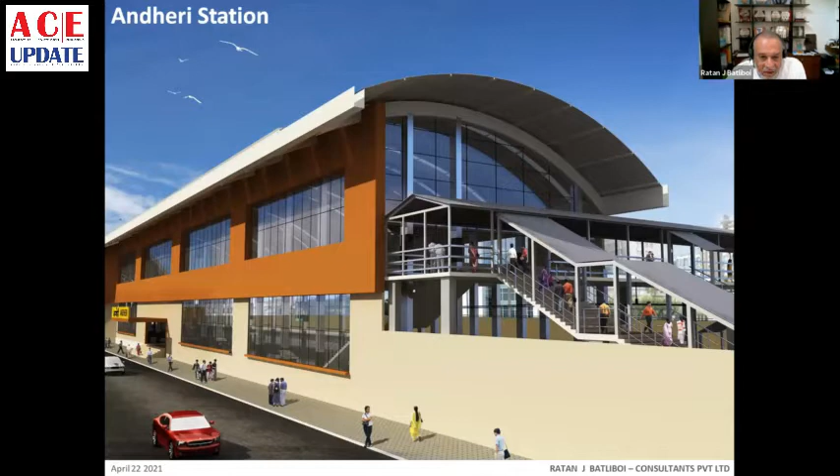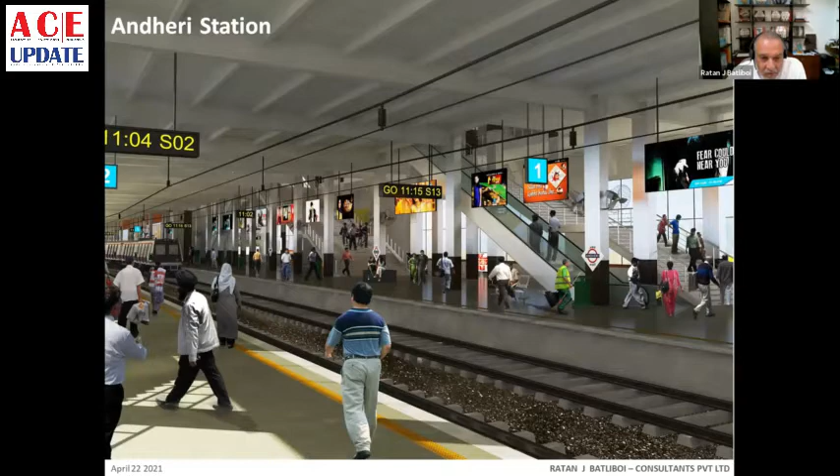Lots of alterations and changes to the existing stations that we had to incorporate newer technologies, to look at extensions, to look at the way passengers would react to the new amenities and things. So there's a few of these photographs and views.

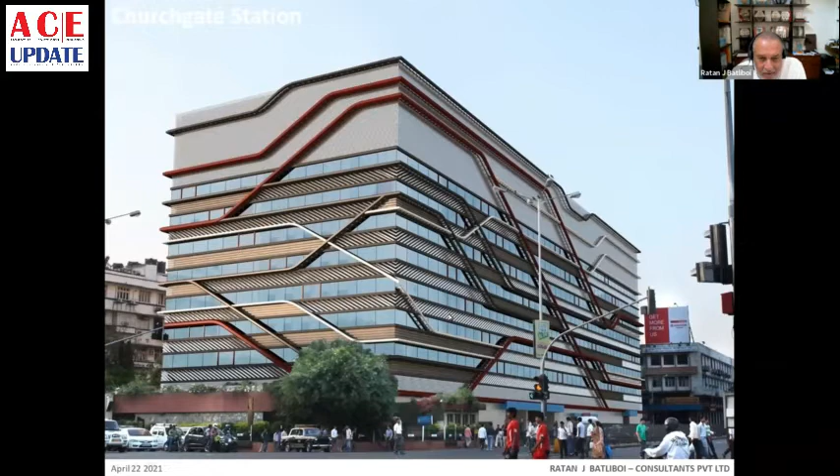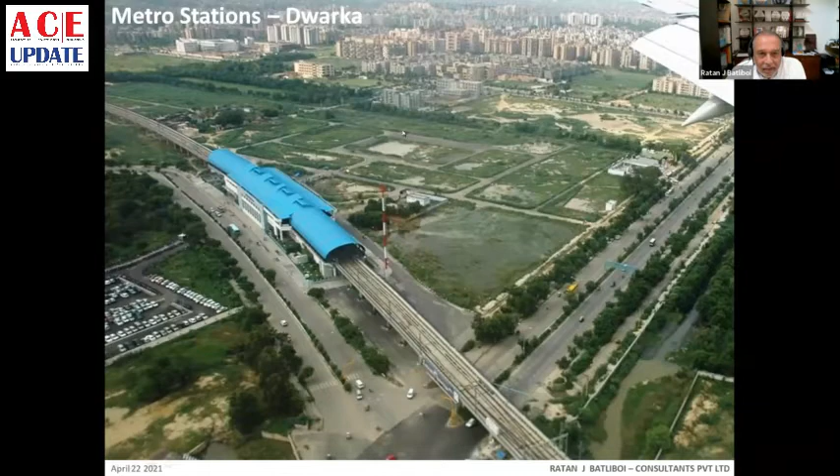We also looked at cladding of the railway station buildings in and around the Bombay Metro. For Delhi Metro, we've done a few stations - in principle, we did the Dwarka line and the Noida line. So I'm just going to show you a couple of views of that.

Very simple, seamless, jointless, very easy to maintain structures. We did about 14 odd railway stations, and they've used this design going forward in many more that we've actually not been the authors of.

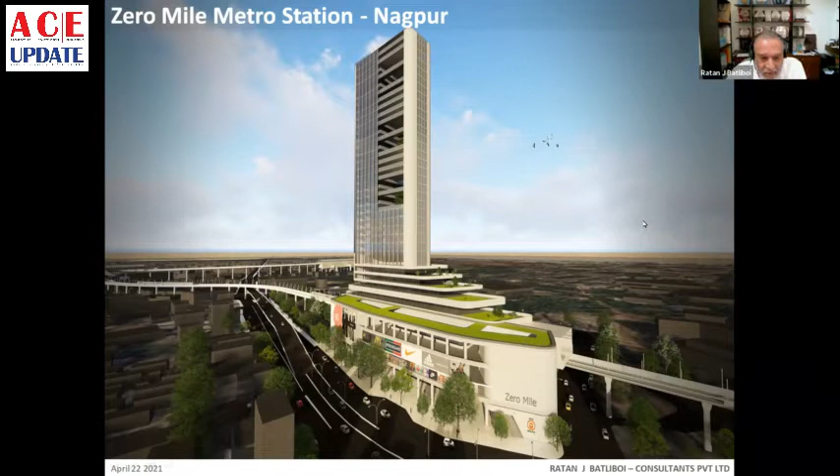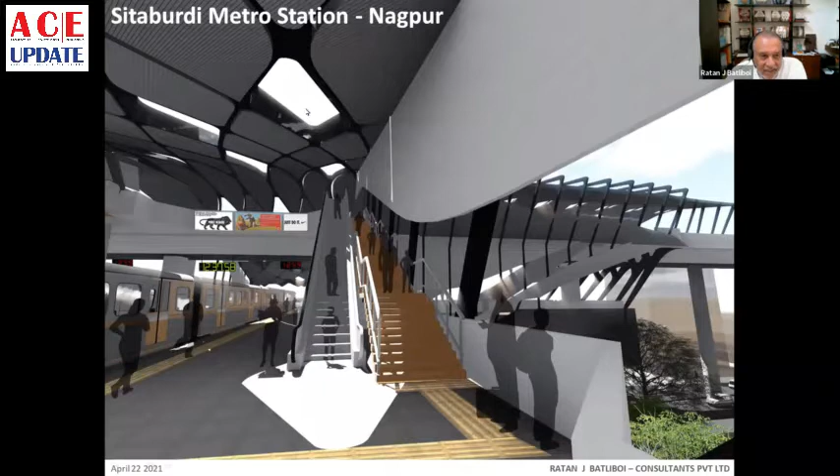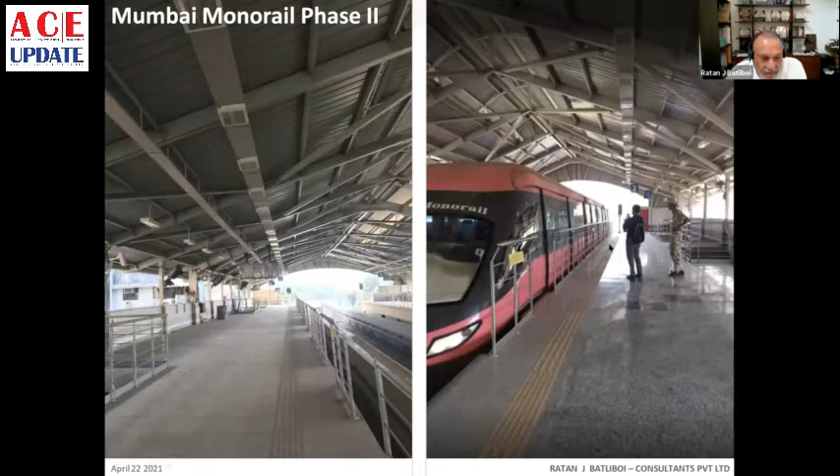Railway station integration with commercial spaces is very exciting now, and they're looking at a lot of things, so I'm going to show that to you as we go along - new concepts of rail over rail and very large terminal buildings in the metros, new skins, new design for railway stations, trying to bring photovoltaics into the ceilings and ceiling skins so that we can become independent and positive energy oriented. We've also worked on the Bombay monorail phase in terms of trying to develop the overall railway stations as the clients wanted them. I'm going to introduce a few concepts here.

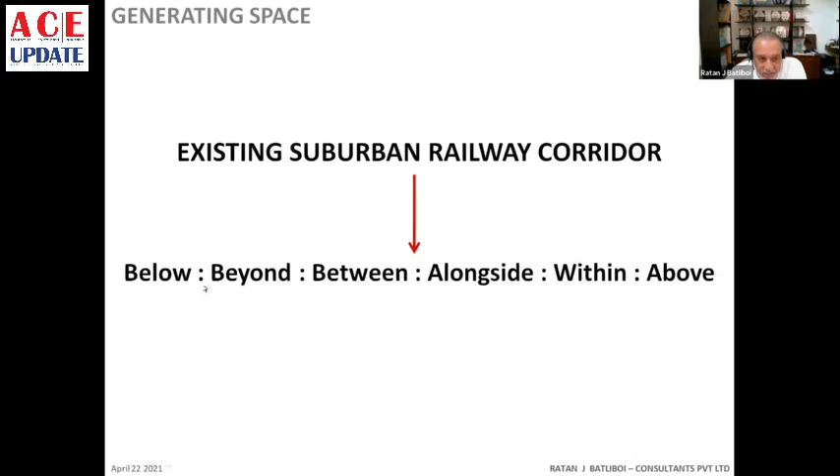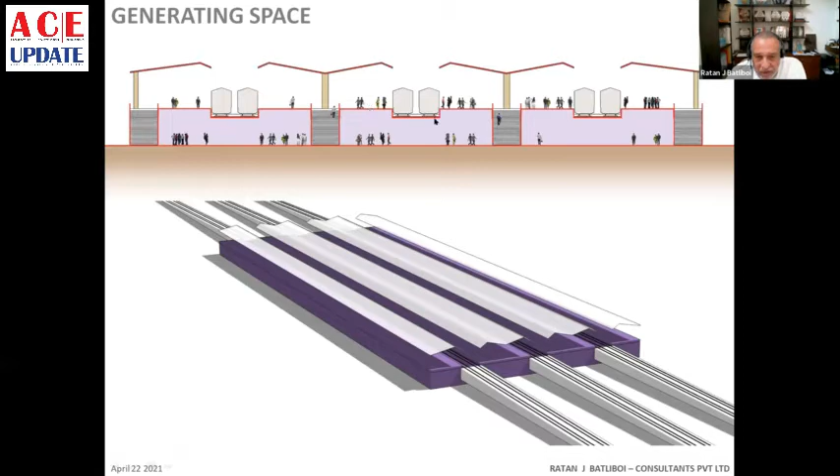The first is below railway stations, where this is the typical scenario. Effectively, if we can dig under and float the railway stations or the railway tracks above, we get a huge amount of space below.

The second is beyond. In normal situations, sometimes there's a road that goes alongside the railway station. If we can extend it and create a large car park or a large facility next door to it, that's the way we're looking at it.

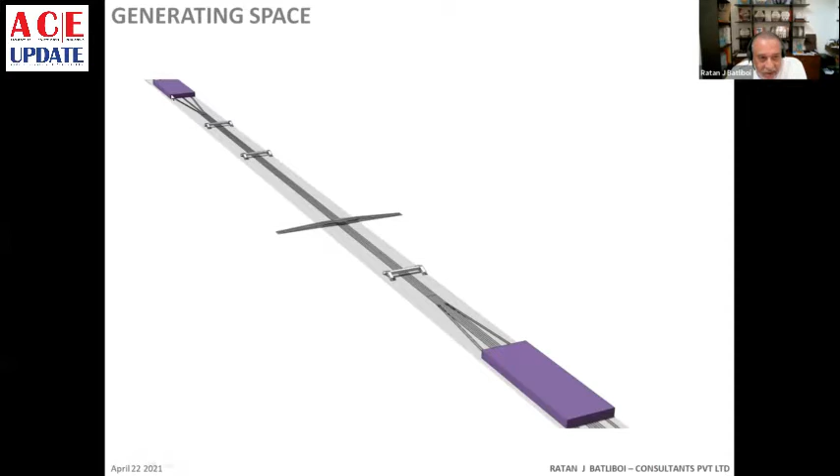If we look at between stations, if these are two purple stations, we look at a third station that comes in between. This is just creating more space on the railway lines, which is technically free space that one can develop on. Alongside is very simple - we've done this in a lot of our station projects.

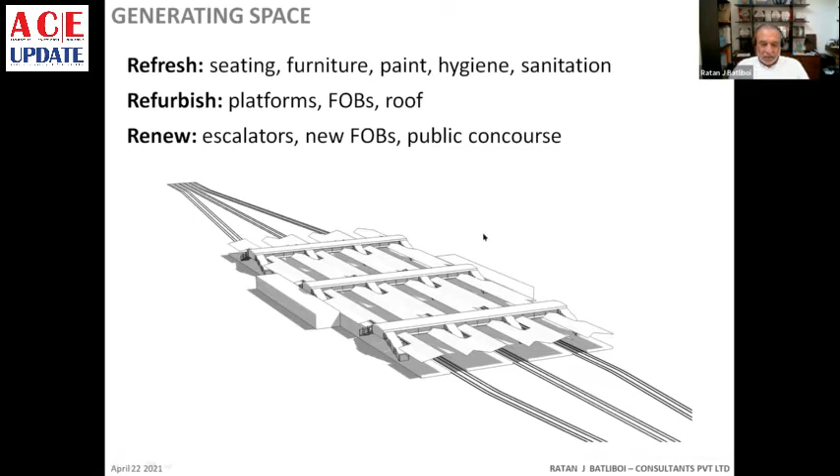Within stations, it's of course refreshing, refurbishing, renewing, things like this for public access, better amenities, better FOBs, more public concourse - basically giving the Indian commuter a little more space to use the facility more effectively. And then we talked about above the railway station - typically, you have the foot-over bridge that goes over.

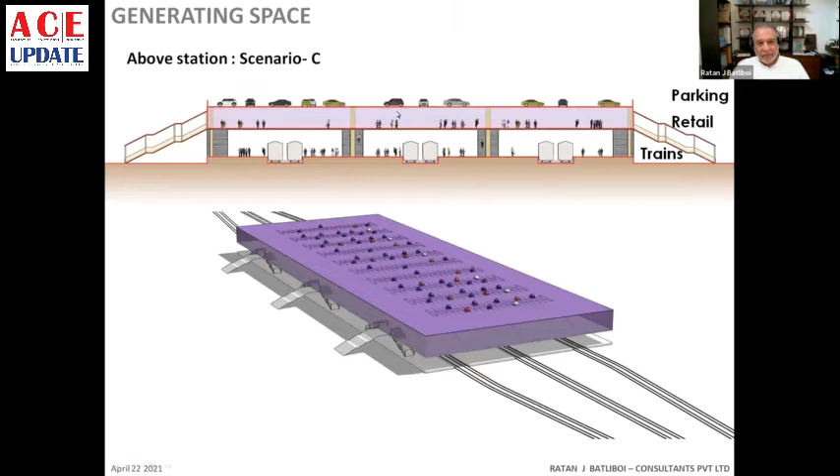And if we can extend that into a large car parking space, or we can go into a mall sort of environment, or we can do a car park as well as a mall environment, multi-layered, as we can see. So in principle, these are the sort of concepts that we looked at.

I'm looking at a new project situation, a new concept that we created in the early 90s, which was creating value, not just adding value. Kharghar railway station was an example of this.

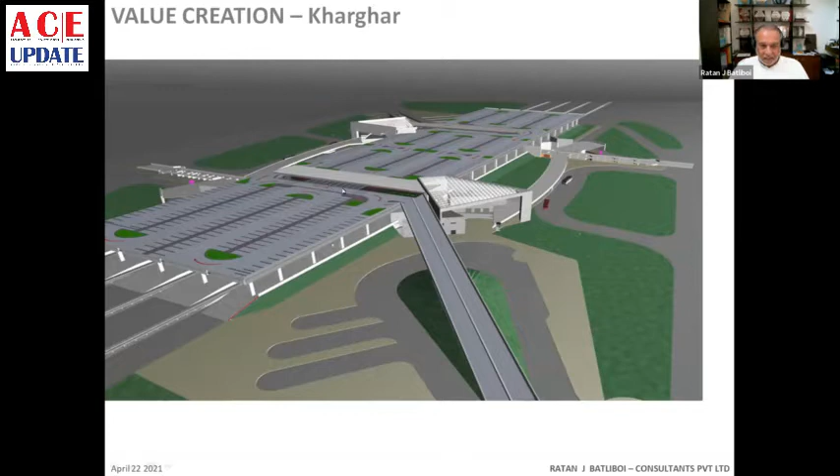Kharghar railway station had about 65 meters by about 210 meters. And instead of doing car parks on the ground, we took all the cars on top. We created parking on top. So in principle, we created a parking space of approximately 700 odd cars.

Our concept was to do 700 into 3 tiers, so you could create almost a kiss and ride scenario, or a drop and ride scenario, park and ride scenario for about 2,000 odd cars. But we weren't allowed to do that by the government at that time, because they said there weren't even 700 cars in this area at the time.

But having said this, this is the broad scenario. If we had to park these cars, we would have needed this much space on the ground next door to it. Having said this, we did not need this.

We were actually able to commercially exploit these areas, or harness these areas, to get the money for the capex of the project. And the OPEX of the project is generated by the number of cars paying you a car parking fee on a daily basis.

Of course, when we wanted to do this into multi-tiered, etc., we weren't allowed to, but this is the situation 25 years since we actually built this.

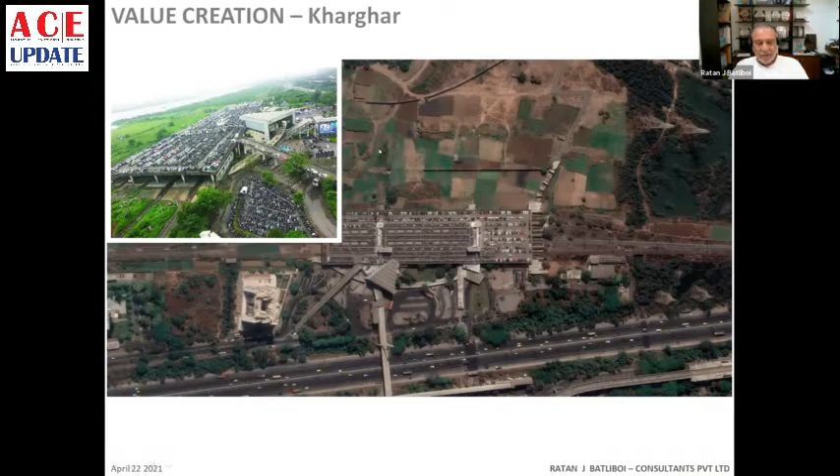Next to it is 12 acres of old buildings, the MSRTC bus station, the bus depot, the BEST depots, which is about 8 acres. We sort of looked at an entire multimodal precinct happening around these areas.

And it's truly multimodal because you have the monorail, you have the metro rail, you have the suburban, you have the terminal station, you have the Maharashtra state bus terminals, you have the BEST terminals, you have taxi staging, you have private taxi staging. Everything happens within a sort of 500-meter radius.

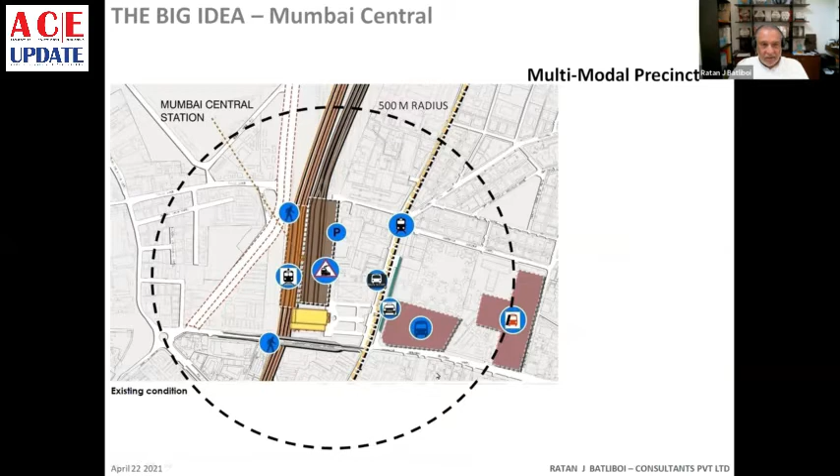And having said this, in principle, what we said is that we'll try and bring all these areas on top of our railway station property. And by doing that, we sort of looked at releasing the land on the ground.

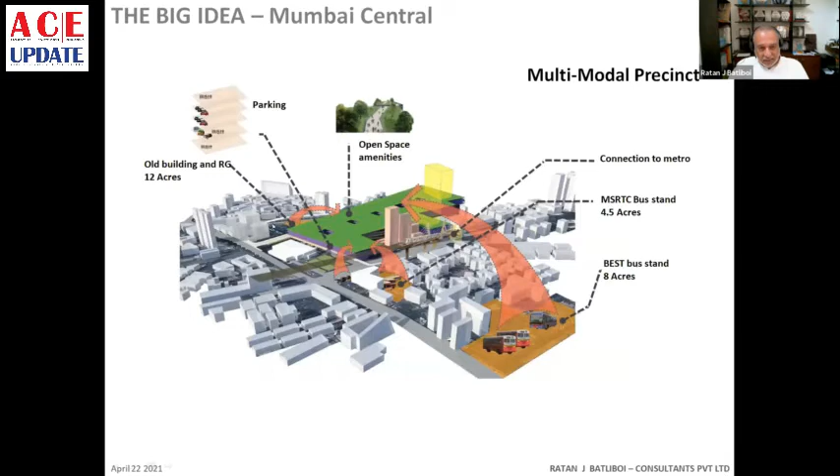So all these areas that are here on the ground are released and created into green spaces for the city. And we take all those functions into a multimodal hub.

This is really truly a scenario where all transportation facilities, as many as you can see here, actually come together in one consolidated scenario. And the entire thing retains the heritage of Mumbai Central Station.

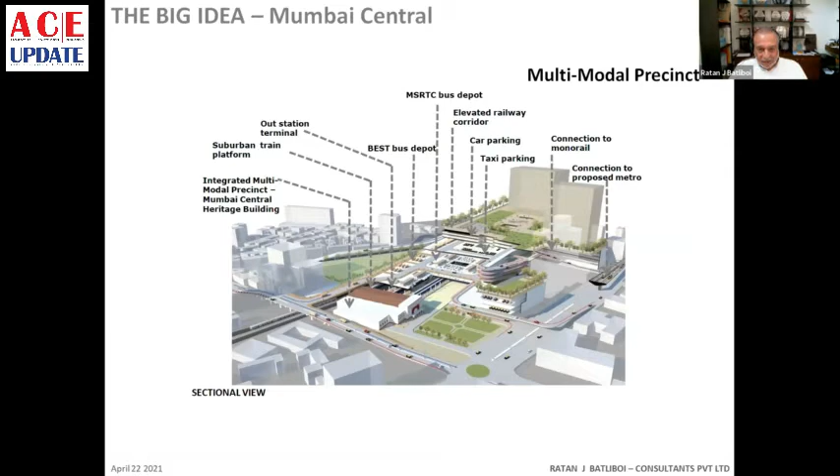We have takeoffs on the road. The entire traffic is completely differently managed. And this is sort of a very interesting game changer product that we've been trying to push since the early 2000s, not to mention that you would be able to do multi-tiering.

On the left-hand side is a list of all the modal transportation aspects that you could bring into this space.

And in principle, you could do towers, or we had proposed to do these large residential towers. At the podium level of these residential towers, you get an additional 20 acres of green space for the towers and for the city itself.

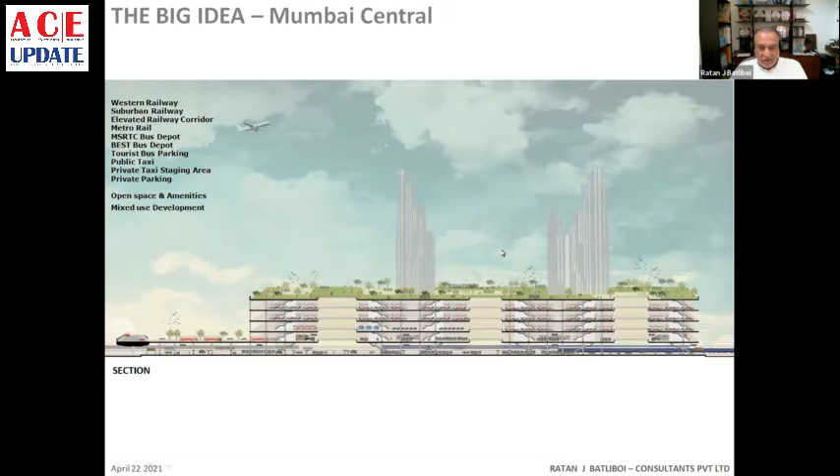So what you're doing is generating 25 to 30 acres at ground level and an additional 20 acres at an upper level. The towers were being designed to fund the project to the tune of about 3,000 odd crores. So in principle, this is our overview.

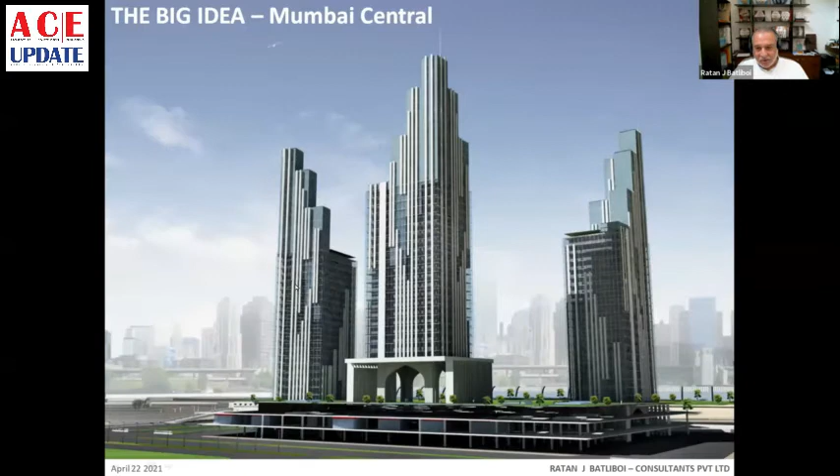And these are a couple of slides to show the sort of artist conception about how this could physically happen in a Bombay environment.

The most important thing is the new transit-oriented development that's happening. In principle, we look at the micro planning, the meso planning around the station, and see how that affects the overall macro in terms of the urban and natural environments. The connectivity that happens on both sides of the tracks, specifically in Bombay, is very, very critical.

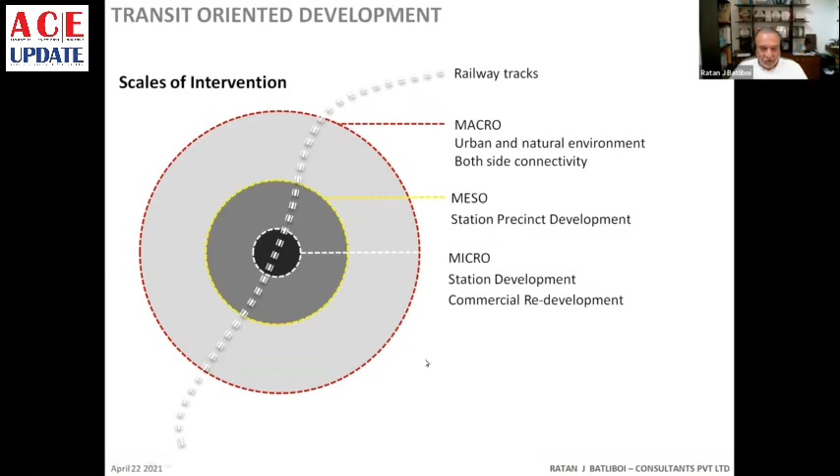I'm just showing you a couple of very quick examples. One was the LTT station in Mumbai. This was the land development. The green space was the additional land we suggested we would take, and the commercial development we could create is almost 8 acres.

That's roughly 32,000 square meters of space, and the area under the railway tracks is about 109,000 square meters. So that's 27 acres plus another 8 acres of land that one could have access to.

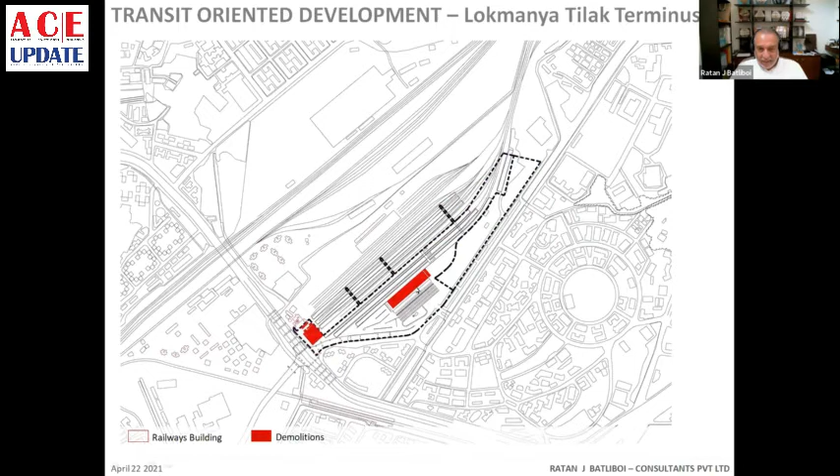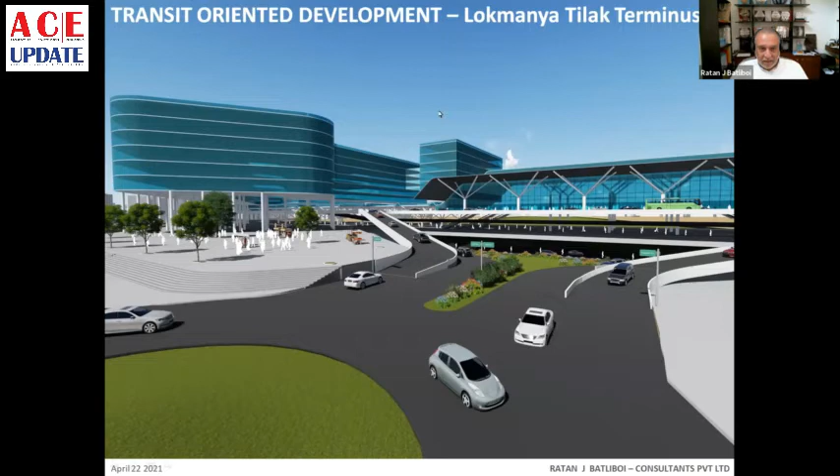We develop it effectively by cleaning up the rail buildings, cleaning up the land to be extremely efficient, creating large, beautiful public plazas and urban interventions, facilitated by traffic management and large spaces, reflecting the lifestyle of the people who would use the spaces, and commercially oriented by renting out spaces that the railways could generate using their land as a free resource.

So these are a couple of views of that.

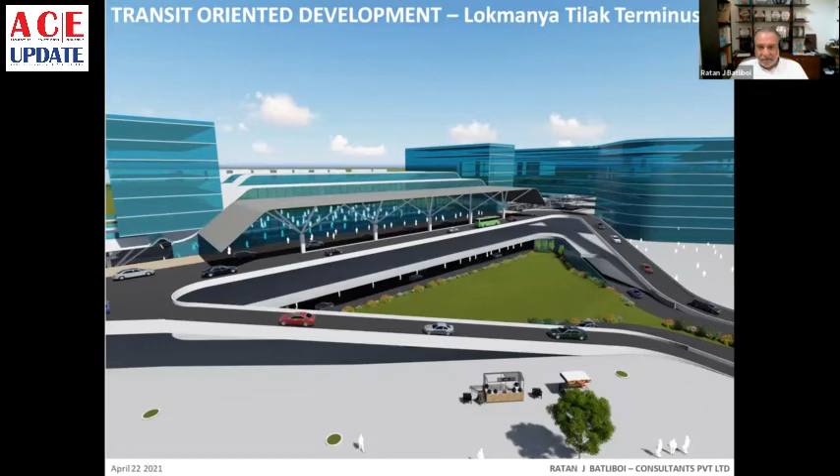Another example is a live, work, and play scenario where we talked about residential, commercial, and recreational space, and we looked at doing this over railway yards, which is really free space.

It can be easily converted into harnessing the commercial potential, which allows the railways to generate large amounts of wealth, and use it effectively for better services to the commuters that use the property.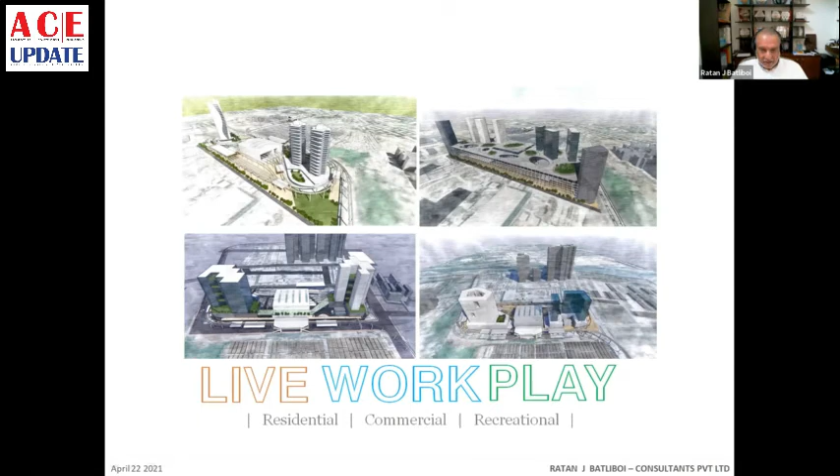So in principle, there's the yard that we had. This is the large depot building that we have on the ground. We were talking about building over the entire depot building, and we looked at a mixed use plan.

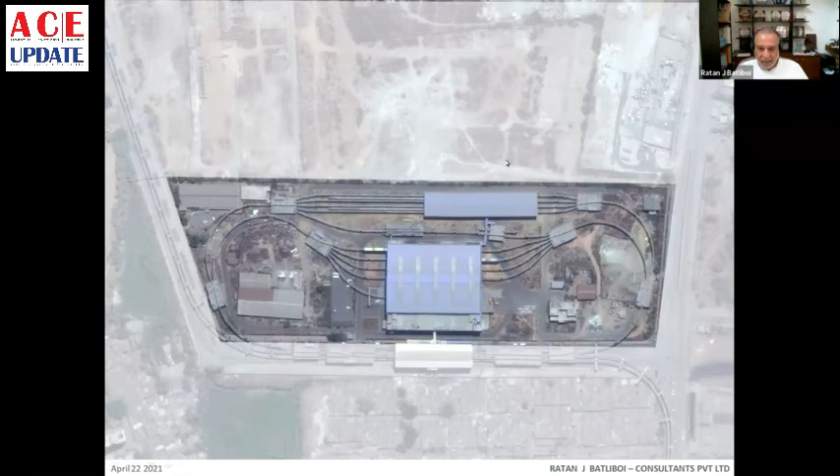We looked at a very large education hub where you don't need too many car parks, where kids and students can come in from all over, using all the multimodal accessibility they have, and using the entire property.

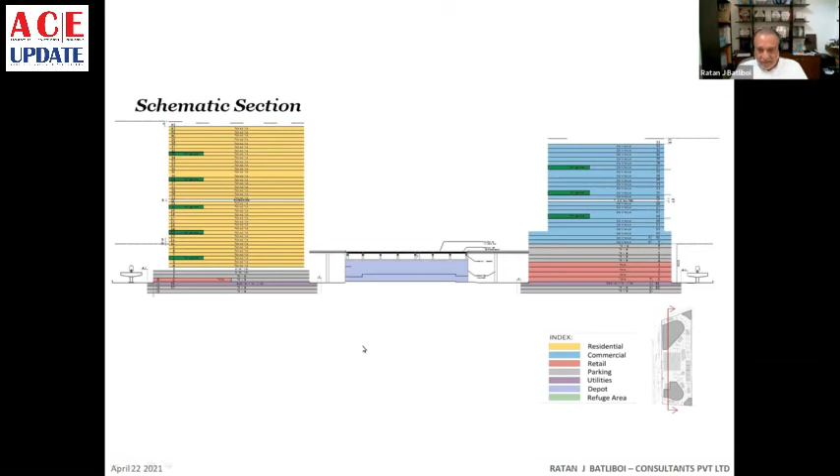The money comes in broadly from a commercial space or a residential space. The commercial space has enough car parking designed for almost 2,000 odd cars. There's commercial space that has the mall, there are offices, and there's residential space that can be sold extremely effectively in a hub like this.

This is the yard that we talked about, and this is the depot building. We're talking about spanning right over the entire building and creating a brand new environment. This is one proposal where we had car parking at podiums to house cars which would come here and use the rail facility from here.

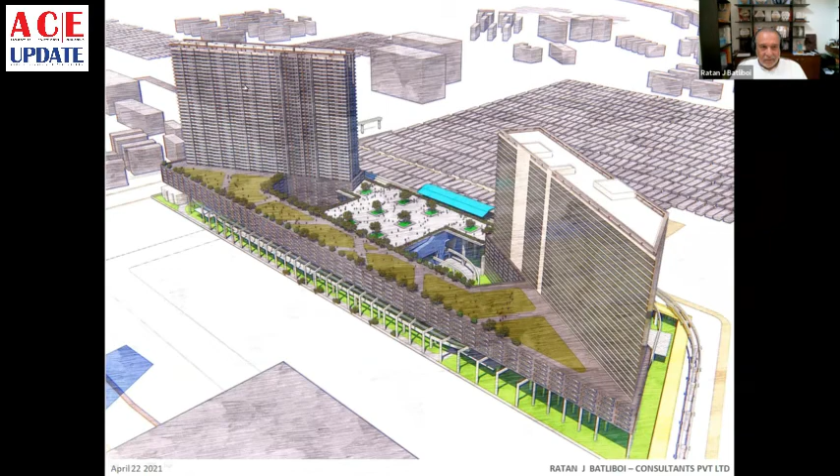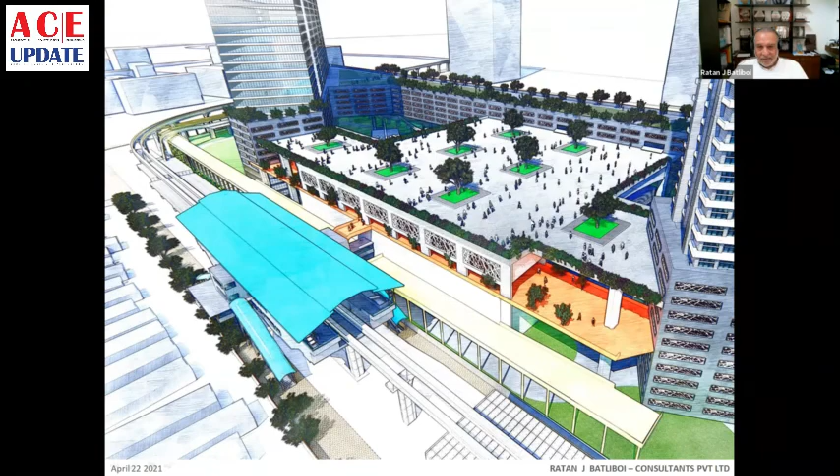We could look at 2 linear buildings, residential and/or commercial, and then kept developing this proposition to create a large 10,000 square meter plaza between the 2 buildings, under which happen commercial spaces, over which you can have a plaza used effectively right through, or even temporary installations creating a large dome space for outdoor environments, exhibitions, etc.

So in principle, this is the proposal we were talking about, and I thought this was a very interesting platform to share how we can look at commercializing space, commercializing land value, which in Bombay is extremely expensive, and getting an advantage for all the users to come together.

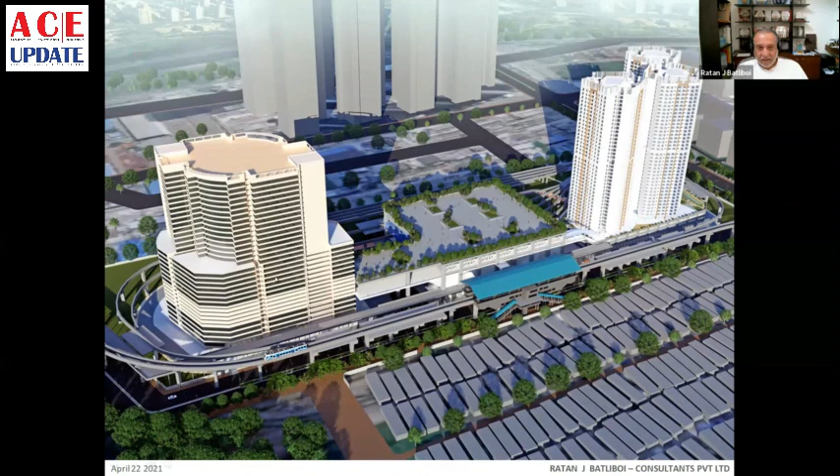So you have a large commercial space, residential blocks in the background, and the rail system that goes through, accessible to the railway station. The station comes across, people can come directly into the plaza, go into the commercial spaces, go into the education spaces, and life is good for all stakeholders.

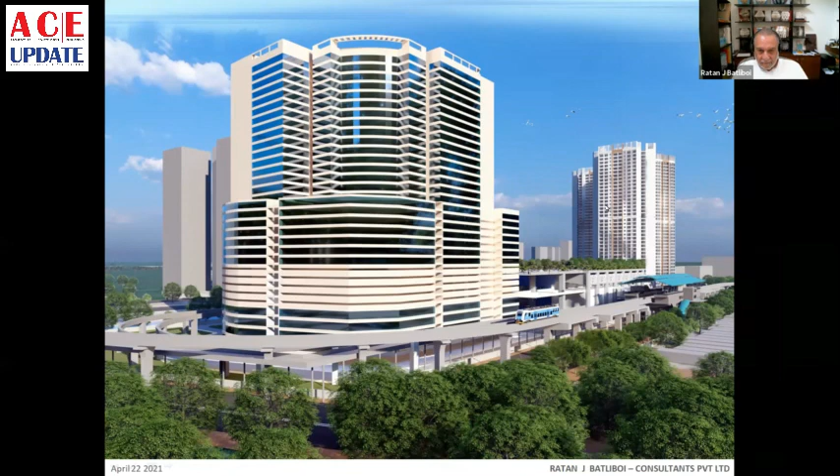And that's pretty much where I'd like to end this little presentation. Thank you.